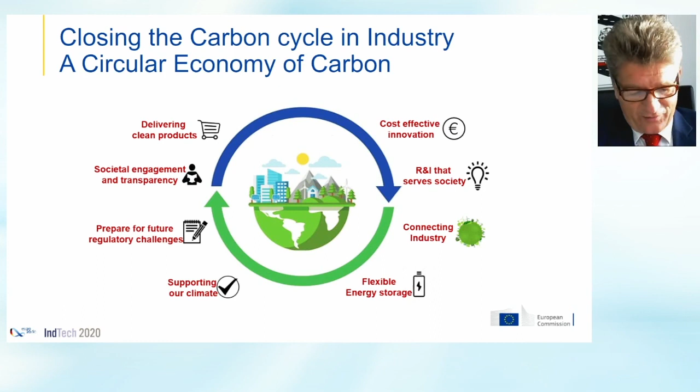If I think of reusing waste gas from industry to another one, the question of pipelines comes and authorization for pipelines. And we know how difficult it is, because also there's a question of, are we transparent enough? Do we have the acceptance of those individuals concerned by it? So the challenge is substantial, huge.

And Wagemann, you mentioned that you don't like, and I fully understand that, the notion of decarbonization, because we need carbon. I hope it's a bit more acceptable if it's combined with recarbonization, because my plea here is that we need to take the carbon out of the primary energy supply, but also to recarbonize the emissions, and I think we will hear about this much more in the presentations after me. We need to use it as a feedstock, to recarbonize it for basic chemicals or synthetic fuels.

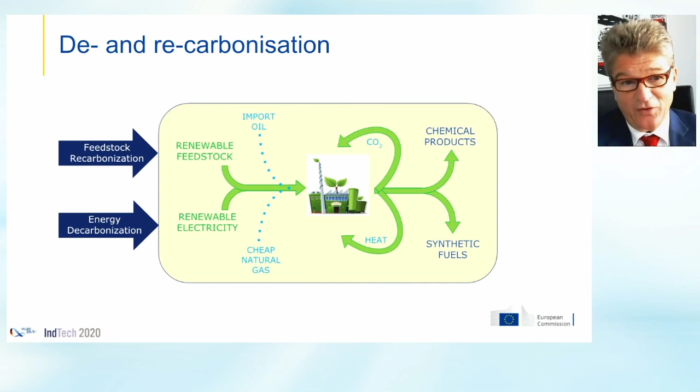This term is new for me. I like it. Oh, good.

So let's come to the opportunities. And here, this is something which is running now. And I hope today there will be new interested participants in this call. It's substantial. We are intending to fund 2 projects in a volume of 40 million. And the deadline is still running, 26 January.

So the background for this is that we proved quite flexible at European level. I have to do a bit of self-praise because we put aside 1 billion euro for COVID-related research as of March this year. And we managed to save the 1 billion euro we had set aside for the Green Deal call, for the Green Deal challenges, already under the current existing program, which is called Horizon 2020.

So we maintained that, and that shows how important the Green Deal remains also for research and innovation, obviously, in the pandemic. So this is an action which is important because it shows also the way how we will work in the future program Horizon Europe, which is co-created. We have discussed the call conditions, the challenges with quite a wide range of stakeholders in order to make sure that it fits best. And this is our intention also for Horizon Europe.

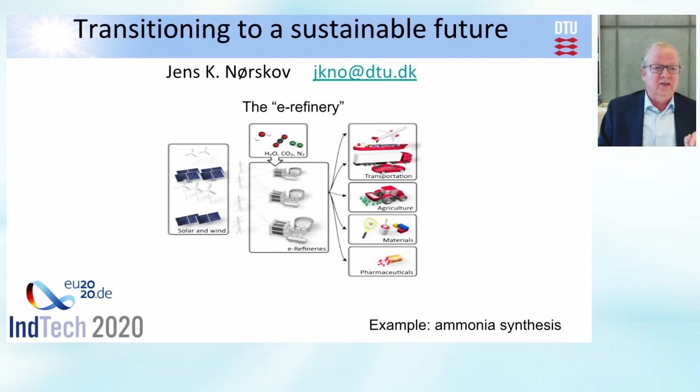Now, I'll be talking about that. I'll use ammonia, making ammonia from nitrogen, as an example, but essentially everything that I'm talking about is very general to this whole process. Now, here's the dream device.

It's a device where on one electrode, we split water to make oxygen. The protons go through a membrane and we pull the electron through, and that's where the energy input from power sources like solar or wind comes in. And then at the other electrode, either we reduce the protons to make hydrogen, or we reduce carbon dioxide to make hydrocarbons and oxygenates, or we reduce nitrogen to make ammonia. And all of these are things that we would like to be able to do very efficiently.

Here's the problem. The problem is that the splitting of water, even with the best catalysts we know today, is very inefficient. So we really need, as we also heard Dr. Dröll say, a breakthrough in order to make this possible. We cannot just scale up what we have and hope that we'll get something that will give prices of energy and chemicals even close to what we're used to from fossil resources. That's problem number one.

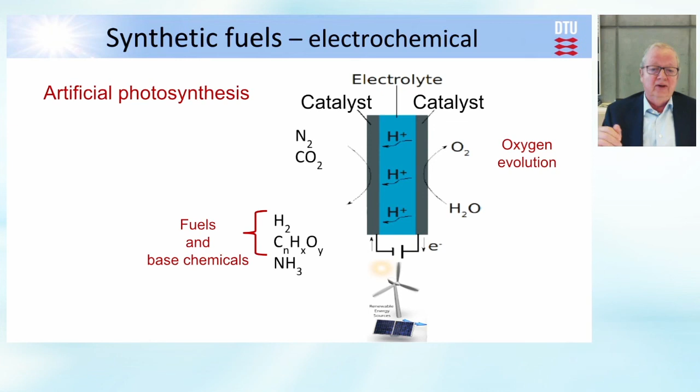If we look at reducing CO2, there we also have catalysts, but they're even worse. And if we talk about making ammonia by reducing N2, they are the worst we have. So there is an enormous challenge here. Making hydrogen is something we're pretty good at, but remember, we first need to split water. We are very good at making hydrogen, but we're not good at splitting water. So even making hydrogen is difficult to do efficiently today. We can do it. There are industrial electrolyzers that can do this, but with a fairly low efficiency. And that's what we're up against here.

Now, this is just summarizing what I said. Now, if we can make hydrogen, then we can also use a traditional thermal catalytic process to transform the hydrogen by reacting with CO2 to make hydrocarbons or oxygenates, or transforming it into ammonia by reducing N2. This we can do today.

The problem there is that the industrial processes that have been optimized over the last 100 years for this are based on very large facilities. They are at high temperatures, high pressures, but if the energy comes from solar or wind, we actually don't need centralized facilities. Perhaps we need to be able to produce these things where they're being used and not where we have the energy. And therefore, we also need a transformation of these kinds of technologies. We would not like an ammonia reactor running at 150 bar out in the barn of a farmer who wants this for making fertilizer. So we have some scientific and technical challenges here as well.

So let me take you through a little bit of the science here, just to illustrate what we're up against. This here, for those that are interested, is the potential energy diagram for making ammonia. I don't want to get into the details. I just want to illustrate to you that it's complex. There are many processes, many activation energies in the problem. In fact, there are something like 14 different energies that you need to optimize at the same time in order to optimize this process. This has been done empirically over the last 100 years, starting with Haber and Bosch and Mittasch almost exactly 100 years ago.

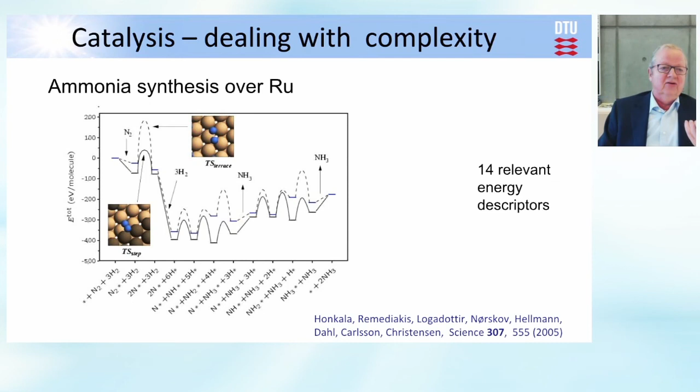Today, it is essentially only iron which is used, and that's not because it's the best, but because it's cheap, dirt cheap. So we can actually project this 14-dimensional problem into a one-dimensional problem. And the key to this, without going into much detail, is that there are dependencies of all the different energies in the problem on this one particular energy. So these scaling relations that were discovered here are the key in order to reduce this complexity as much as I indicated.

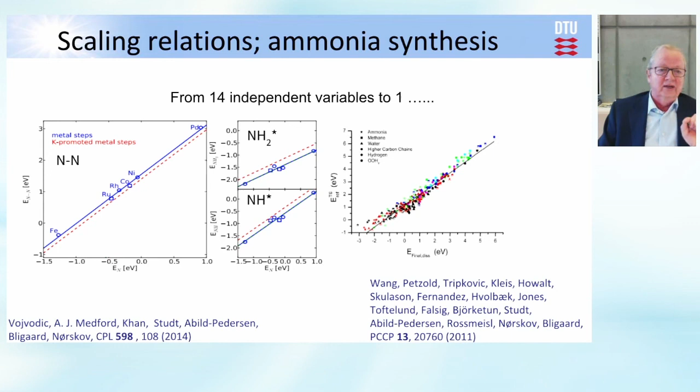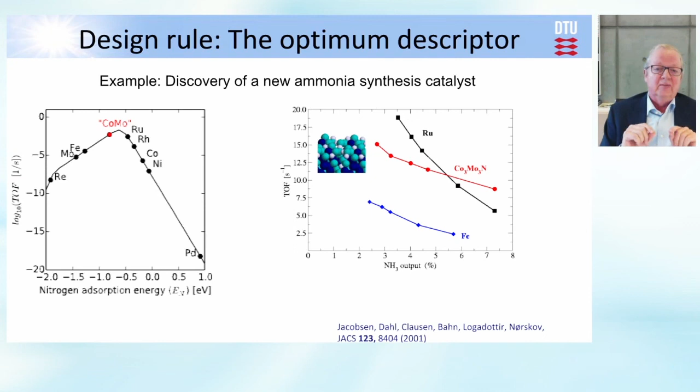And you can see that iron is not nearly as good as ruthenium, and this cobalt molybdenum intermetallic with a little bit of nitrogen actually is as good, or under some circumstances better than even ruthenium. It's not nearly as cheap as iron still, so iron is still being used, but this is to illustrate that if we understand well enough what is going on, we can actually begin to design catalysts in this way.

So these nice scaling relations that made it so simple for us to optimize also define actually what is the biggest hurdle for something much better. That is, we actually need to get off these scaling lines. And therefore we need completely new ways of designing catalysts that have this property. We need more functionality. That's what this says.

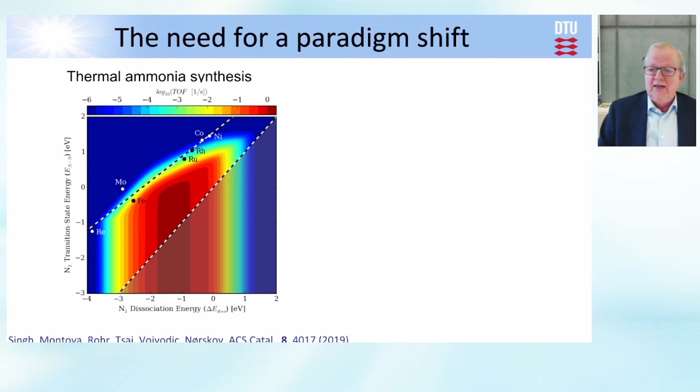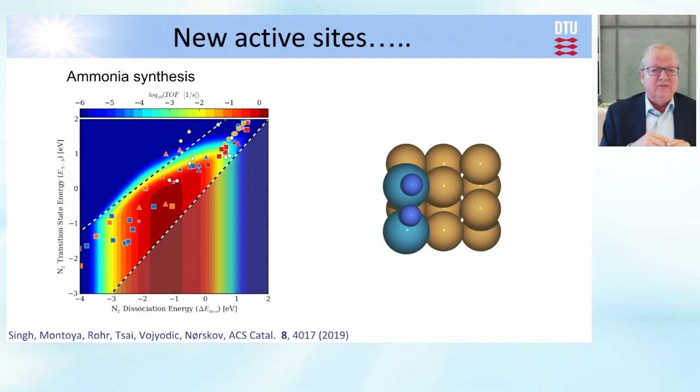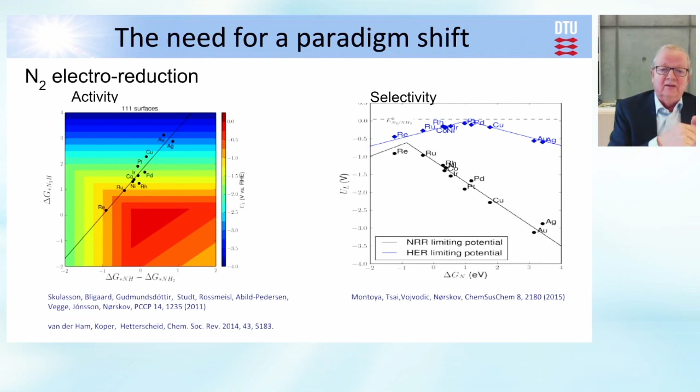And there's an even worse problem. And that is that if we look at different materials and look at the rate of making ammonia, which is the lower curve here, and compare to the rate of making hydrogen, because you have protons coming in. They have the choice of reacting with each other to form hydrogen or reacting with nitrogen to form ammonia. And you see the rate for making hydrogen is much, much higher. This is a logarithmic scale.

So we are up against the fact that the catalysts we have are way off optimum, and those that we have make hydrogen and not ammonia. And so we have some real design problems here. And this is why, as I mentioned earlier, this is the process where we are furthest away from doing anything reasonable.

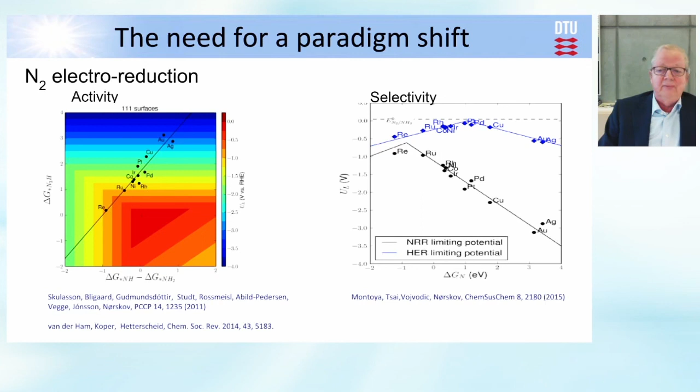Instead of controlling the number of protons coming in, we can actually also perhaps control the number of electrons coming in. That's what nature does in the enzyme nitrogenase. There's actually a very, very clear control of electrons coming in, and that's why you can make ammonia in plants or in the enzyme with a high efficiency.

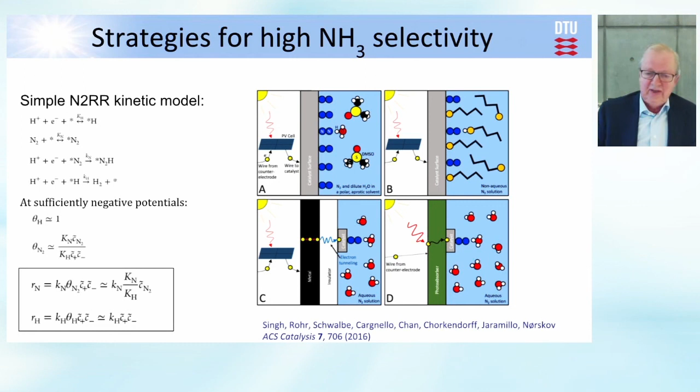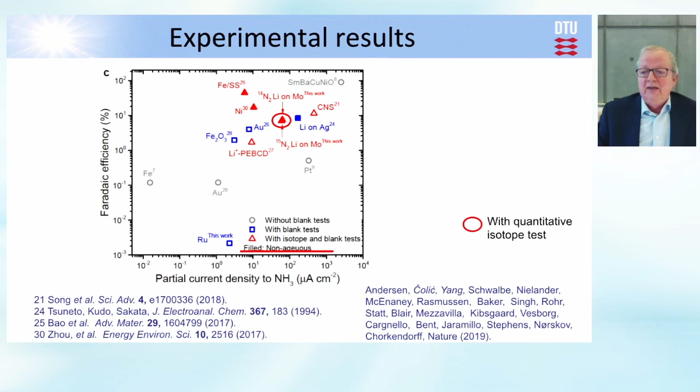the nitrogen coming in. But the long and the short is that only the filled symbols, which have a high efficiency and a reasonable rate, are the ones at the top. And they are ones where we are in an aprotic solvent, that is where we have low excess of protons, just confirming the model that I showed to you earlier. And in fact, there's really only one system where real good experiments have shown that this is a reproducible system. By reproducible, I mean one where other people can make the same experiments and get the same results.

Now, this is actually an interesting system. It uses lithium as the catalyst, and you run the reactor by actually depositing lithium, just like you do when you charge a battery. And then the nitrogen reduction takes place at the surface of this lithium. It's an idea that actually goes back to the 30s, and then it was forgotten. Then it was rediscovered in the 90s and then forgotten. And now a number of groups have actually gotten in and really shown that this is something that works.

And it works. It has an efficiency of something like 20% if you just try and do this, which is orders of magnitude better than anything else. Still a very low energy efficiency. The problem is that you can do this for a while, but then it becomes unstable. That's not so strange because you have to deposit lithium continuously, and obviously that lithium will stop being there. So you need to do something else. It's not scalable.

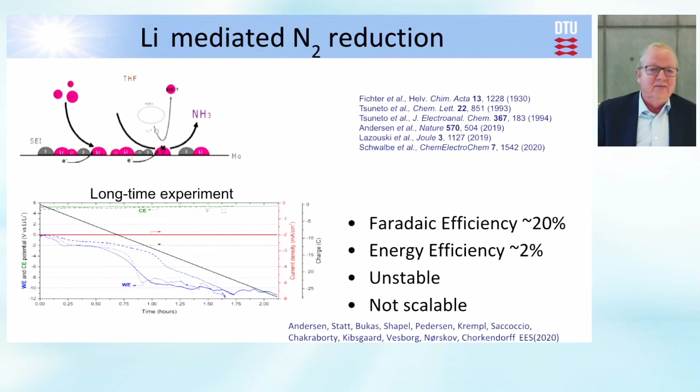Sorry. I'm there now. I just want to show that there are strategies now where we can get close to 40% efficiency, and we can really begin to do this. So there's hope.

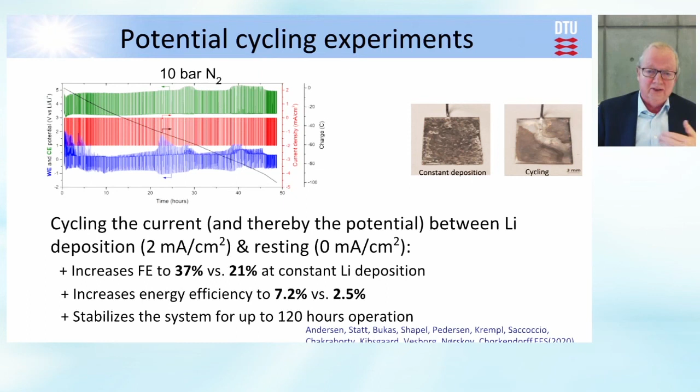I just want to make sure that those who did the work are thanked here, but just make the point again that there are challenges on scale-up of these processes, and this is not just for ammonia. This is also for making hydrogen. But underneath that, there are actually some scientific challenges that should not be forgotten, because I see a lot of test facilities being built, including funding from the Commission, but I don't see much interest in actually solving the underlying problems. And so this is my recommendation, that we really get on with the science in parallel to the scale-up. Both are needed. Thank you very much.

Yeah, thank you very much, Jens. Thank you for describing so precisely where the challenges, where the problems are. But at the end, we could get an imagination of how progress could be. So I would say, Jens, you gave us hope. And you will be with us also during the discussion. I think there will be quite a lot of questions.

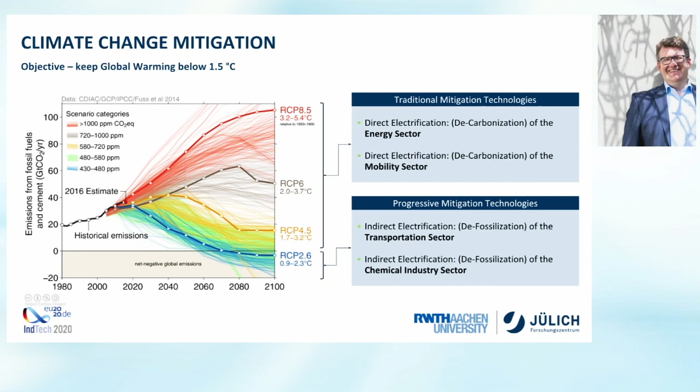And indeed, this is what we are doing in the project that has been mentioned already. I encounter some problems with switching back and forth with my slides, but this indeed is where research in Germany is done in a national flagship project, what we term Copernicus. So Copernicus, the name is because it involves a shift of paradigm.

And this is where we concentrate forces from the most important academic partners in Germany dealing in this area together with the industrial partners, but we also include partners from the society, which means the technologies that we want to develop in the field of power to X have to be not only efficient and technologically perfect technologies, but they have to be also accepted by the society.

And in this project, we follow two different technology pathways. So the one is a green hydrogen pathway, where we start from renewable energy and we feed in this renewable energy along different valorization pathways. But we also have a second technology pathway where we follow an electrochemical valorization of CO2.

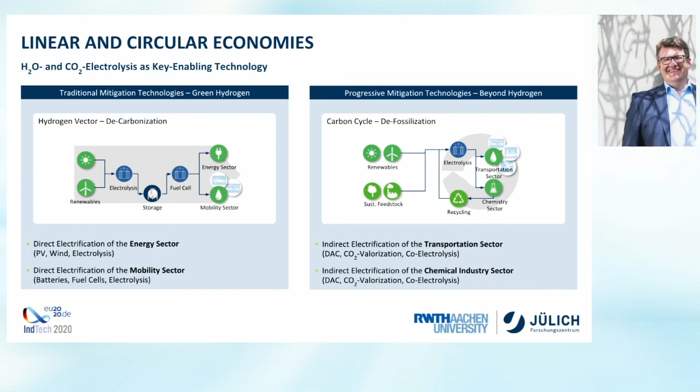Now the question is, what is the CO2 source? And in this respect, we can distinguish between two different future CO2 sources. And so now if we follow this feedstock transition as outlined by the European Green Deal initiative, if we consider the right-hand graphics, we can either use industrial point sources beyond coal incineration or something, and then we can collect this CO2 and we can feed it back into chemical production. And then we have a closed circle, and then we can talk about real CO2 neutral production.

Now, this will be one future CO2 source, but the question is, can we become even CO2 negative? And the answer is yes, we can do so, if we can let nature do part of the work, which means if we consider biomass as a scalable, available CO2 source, and then if we feed in, for instance, by a biogas plant, the biogas into our power to X process, then we can consider a truly CO2 negative value chain.

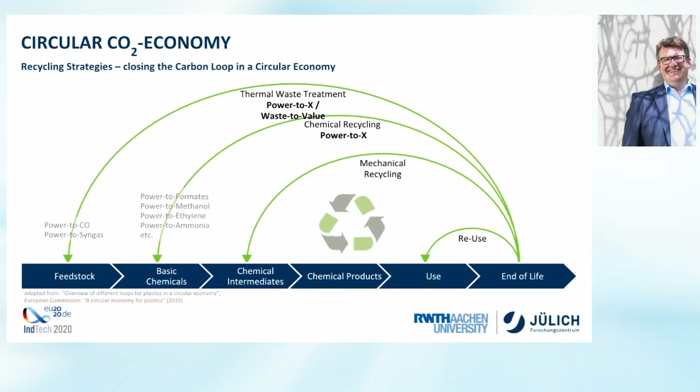And by doing so, we can establish a circular CO2 economy, and Power to X adds on, or is one of the toolboxes that we need for recycling strategies. So now if we consider the lifetime of any chemical product, at a certain time, it will come to its end of life. It can be reused, it can be mechanically recycled, it can be chemically recycled, but still there will be some parts of products which cannot be chemically or mechanically recycled. And then thermal waste treatment is the only solution, and thermal waste management is one of the concentrated CO2 sources. And this is where Power to X can close the loop for a 100% efficient recycling strategy.

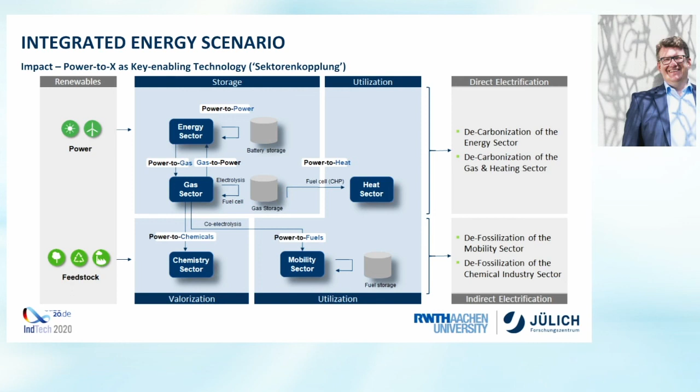And then it means that Power to X can link different sectors. This is the key technology to bring renewable electricity into sectors where we cannot directly electrify, which means Power to X. X can be heat, X can be fuels, X can be chemicals, and X can be gas for intermittent storage.

So now, coming back to our Copernicus project, one of the highlights is a satellite project where industries like Siemens Energy and Evonik have started to demonstrate Power to X value chains. And one of the nice examples is in the satellite project Rheticus, where it is demonstrated already on a technological scale the conversion of carbon dioxide to specialty chemicals, and this is close to a business case already, which means we can come up really with demonstration solutions by using Power to X.

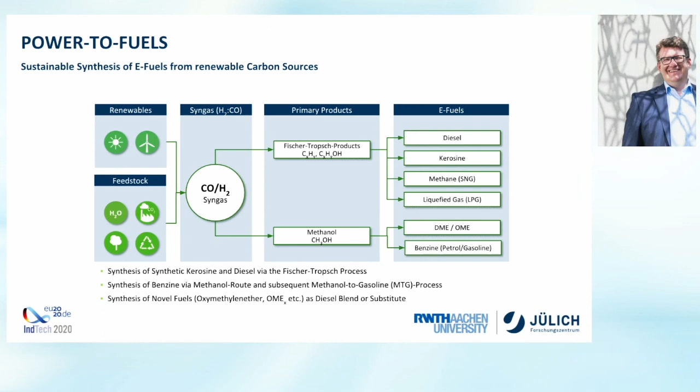Technology is similar to the example that I have presented already for the specialty chemicals, which means we use renewable electricity, we use renewable resources, CO2 point sources, biogenic sources, and then by means of electrolysis we produce syngas. And then we enter the established industrial routes, how you can produce from your process gas by means of Fischer-Tropsch or by means of methanol routes all kinds of different synthetic fuels. And these synthetic fuels already now might also be used as a blend or as a substitute, which means it can be fed into the value chains in order to help to reduce the emissions of the existing vehicles.

Rüdiger, presently we don't hear you. And you also have to come to the end. Yeah, I am at the end. I am failing to come to my last slide, but perhaps I can adjust. I just can, yeah. Okay.

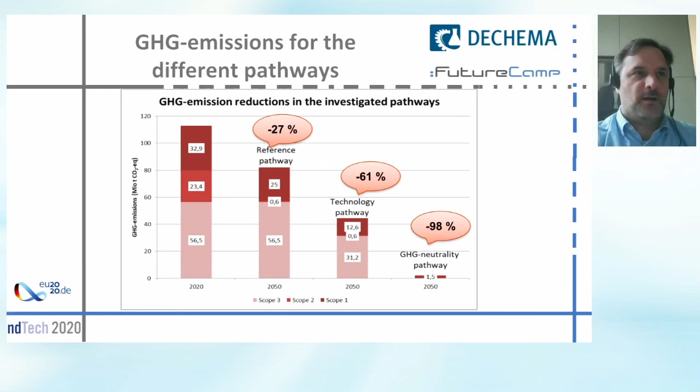That is because our report focused on CO2 emissions. There are some emissions from other greenhouse gases, which were not explicitly tackled in this report. And therefore, we decided to show them here on that slide, because we haven't abated them, so to speak, in this report. And there need to be some additional measures taken in order to abate them.

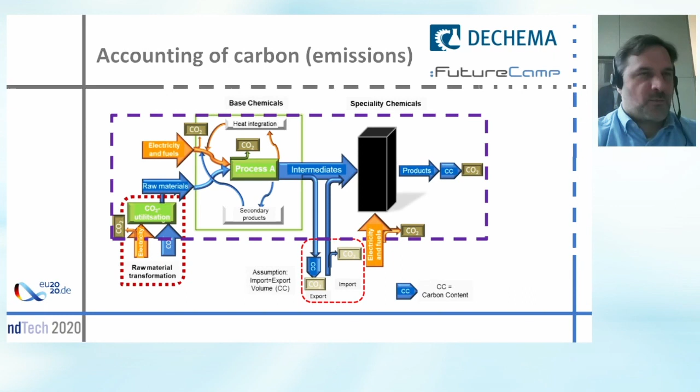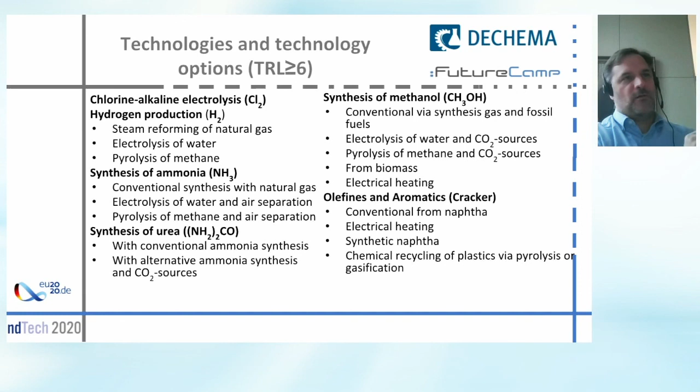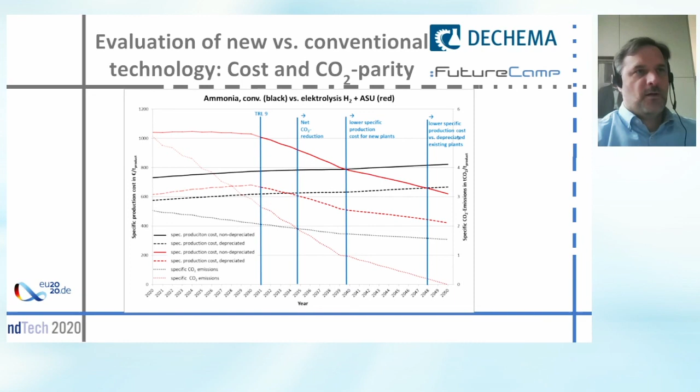And the last line is where a new ammonia plant with a new technology actually becomes competitive with an existing plant of the old technology. And that is, sadly enough, the situation we essentially face in Europe and in Germany, that we have plants for the basic chemicals which have been operational for decades already. They are depreciated. And this is the economic challenge for any company to build a new plant on a new technology.

What we also did is we compared the sensitivity of the parameters, and in this case, it's not really surprising, the electricity price that you put into the system and the model and the price you put in on the fossil fuel are the relevant parameters. Interestingly enough, the CO2 price is not that relevant. And that is due to the fact that you are working against a process which is based on natural gas and therefore doesn't produce that much CO2 because it doesn't contain that much carbon.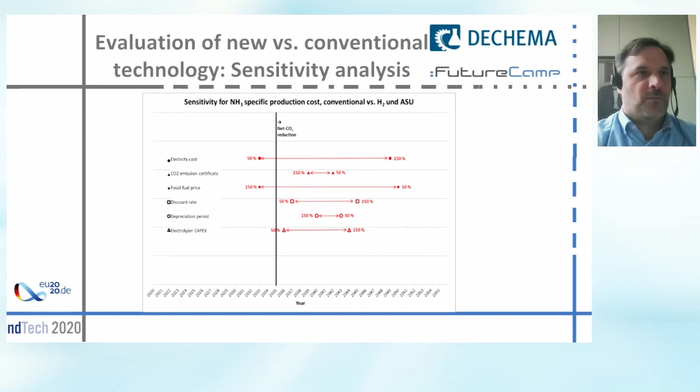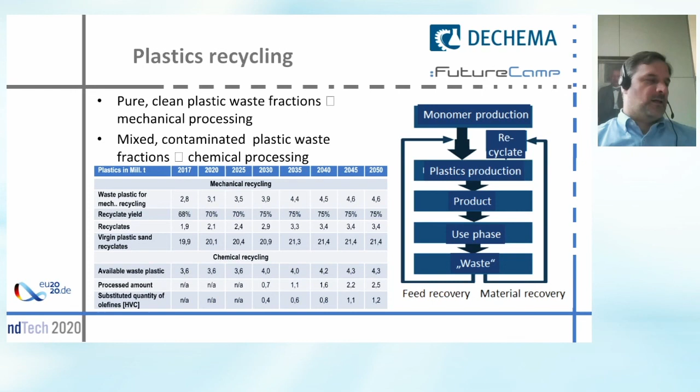Okay, we also had a look at plastics recycling, which we see, as Rüdiger Eichel mentioned before, as one of the major components to bring in carbon in a circular fashion. We looked at mechanical recycling, which we currently know and do already, and we looked at chemical recycling, which is currently not implemented on a large scale and has the potential to reduce the carbon demand in the chemical industry. I skip over, well, maybe not yet this one.

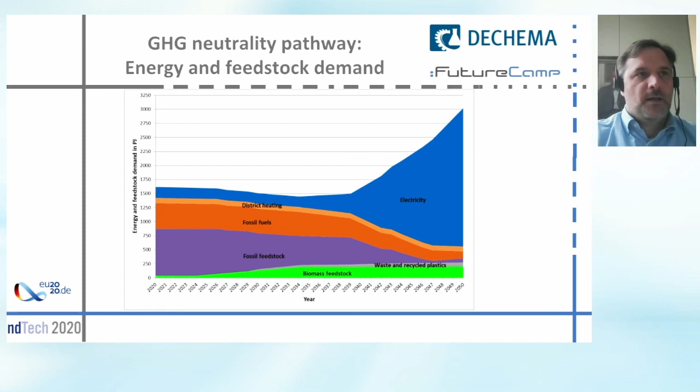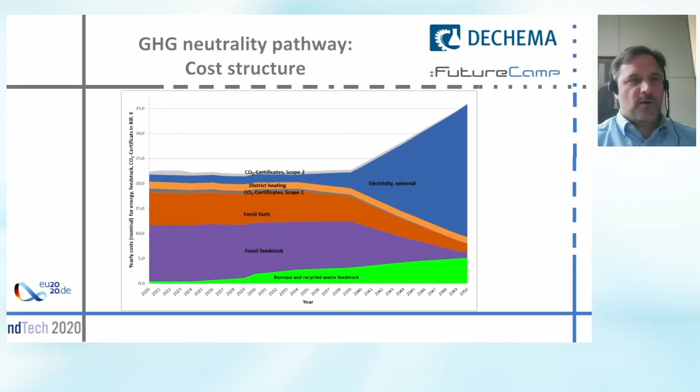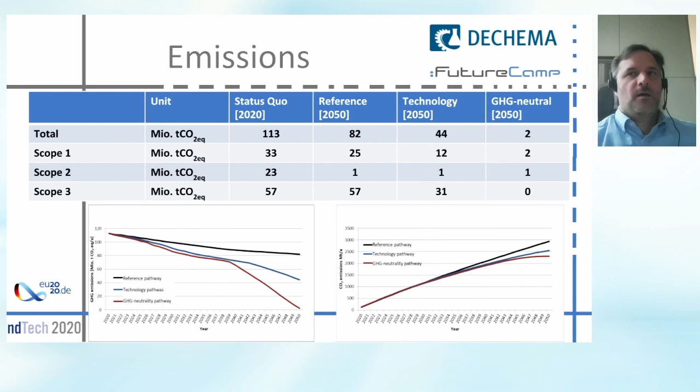And finally, I just want to say, within the chemical industry, there's no silver bullet. There are a lot of different things which have to be changed. It includes the own heat and power generation. It includes the questions of what is our feedstock. We will have a hydrogen demand, which is very, very large. We will see an electricity demand in the order of the electricity system in Germany. It is not said in that study that this electricity demand has to be met in Germany, but the overall amount of electricity still will have to be provided somewhere. And that's all I want to say for the moment.